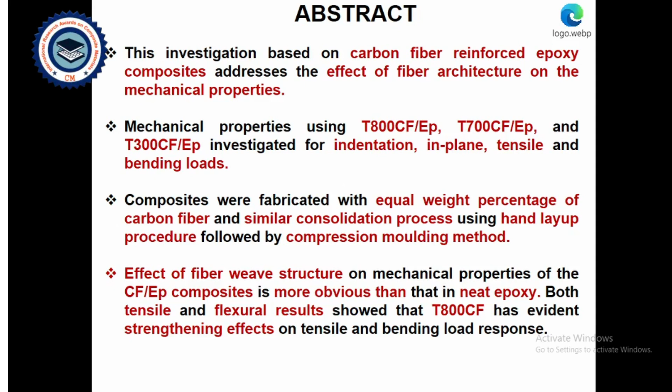Both the tensile and flexural results showed that T800 carbon fiber epoxy composites has evident strengthening effects on the tensile and bending load response.

Also, fiber architecture marginally affects density and severely affects strength and deformation. Here, composite performance is dictated by inherent properties and fiber weave structure. Even with fiber flaws, porosity, defects, and stress concentrations, the weaving pattern is so beneficial that it makes composites more or less insensitive to flaws.

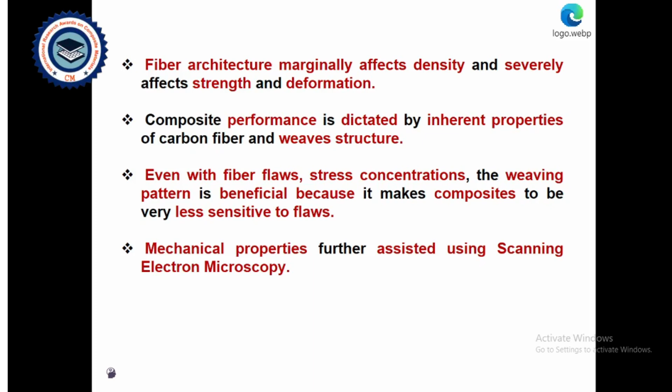Finally, mechanical properties were further assessed using SEM, that is scanning electron microscope.

The key literature consists of carbon fibers presenting exceptional advantages in strength-weight relation, affecting mechanical properties, Materials Letters, which was studied by X. Liu and team.

The impact of carbon fiber architecture on the mechanical properties of composites, especially two failure modes critical in designing with delamination, flexural failure, and polymers.

Carbon fiber epoxy composites display higher mechanical properties, studied by B. Patro and team. Common fabrication induced flaws and defects with corrective actions to improve sample quality, studied by U. Farooq and P. Myler.

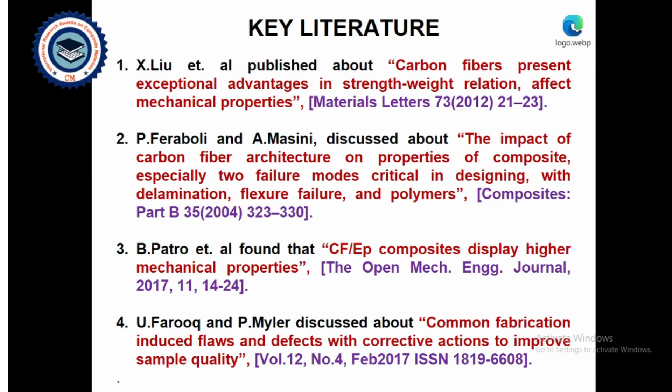Number of laminae in composites and fiber orientation affect mechanical properties, studied by H. Rahmani and team. Proper combination of polymer arrangement is essential in structural composites, studied by J.M.F. de Paiva and team.

Toray sized T800 carbon fiber epoxy composites had higher mechanical properties, studied by L. Wang and team. Mechanical and dynamic mechanical properties of fiber reinforced composites improved significantly with increased fiber content, studied by W. Liu and team.

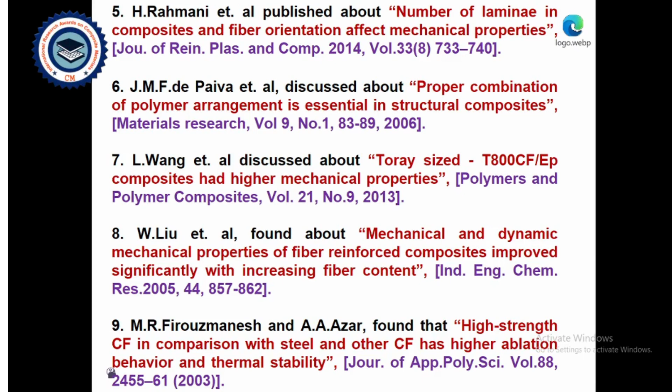Research gap: less research work on carbon fiber epoxy composites considering different carbon fiber architecture has been observed. Less research work on twill woven carbon fabric, that is hybrid carbon fiber epoxy composites. Then PMC structures fail in flexure, hence development of new fiber structure with improved flexural properties is needed.

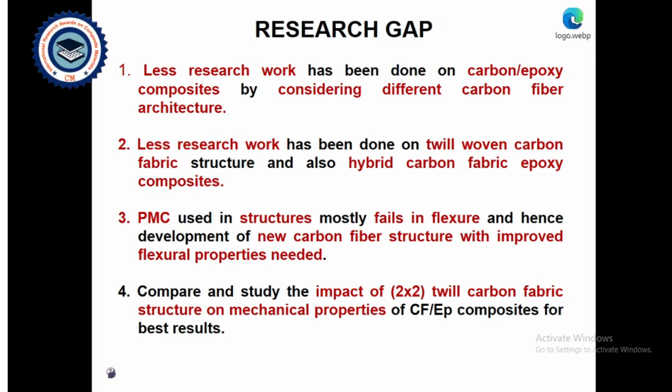Impact of 2x2 twill carbon fiber structure on mechanical properties for best results - we want to compare and study it.

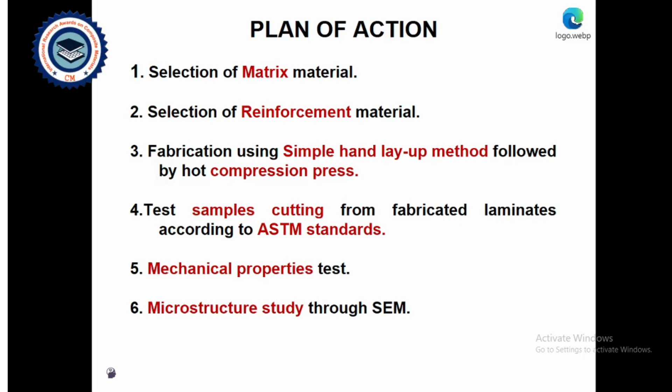Plan of action: selection of matrix material, reinforcement material, fabrication using simple hand lay-up method followed by hot compression press, test samples cutting from fabricated laminates according to ASTM standards, mechanical properties test, and microstructure study through SEM.

Method of fabrication, selection of matrix material: first, epoxy resin Araldite LY1564, hardener Aradur 22962, and the epoxy resin-hardener mixing ratio by weight percentage was 100:25.

Selection of reinforcement material: carbon fiber will be bidirectional twill T800, T700, T300, and combinations of T800-700, T800-300, and T700-300. Twill structure was selected because the pattern is elastic, the weave is looser, and it is good for complex shapes.

The composite compositions studied were: T800 carbon fiber alone with epoxy, T700 alone, T300 alone, then combinations of T800 and T700, T700 and T300, T800 and T300 with epoxy.

For these combined composites, the carbon fiber and epoxy by weight percentage remain the same: 60% carbon fiber by weight and 40% epoxy by weight respectively.

When it comes to individual carbon fiber, only one type of carbon fiber, it is 60%. When it comes to combination, we selected 30% plus 30% for each of the two carbon fibers.

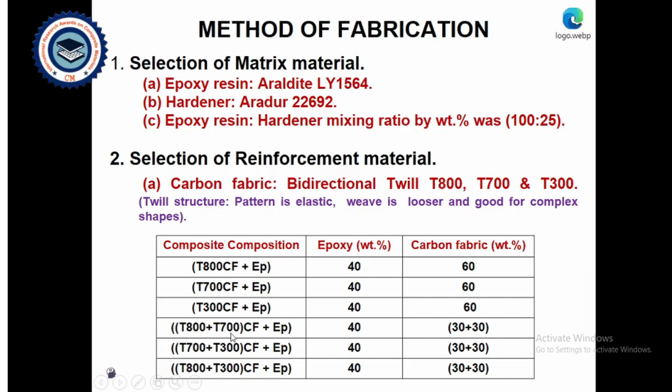We use the simple hand lay method to obtain the required fabricated composite material, followed by hot compression press, with nominal equal weight percentage and identical consolidation process for all 6 types of carbon fiber composites. Compression used was 0.5 megapascal, cured 24 hours at normal room temperature, then cured in an air-distributed oven for 1 hour between 90 to 100 degrees.

Laminate size was 300 by 215 by 3 millimeters.

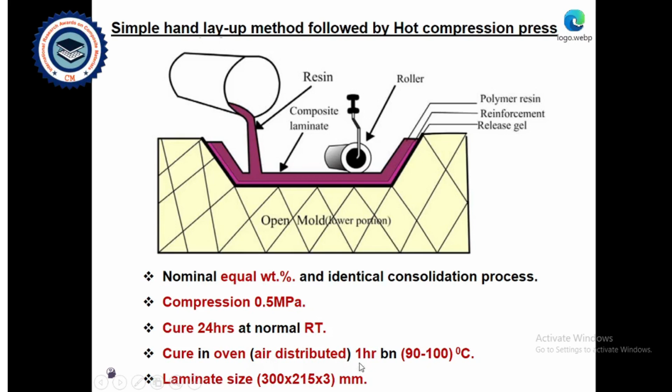Tests performed for mechanical properties included: interlaminar shear strength, hardness using Shore hardness, tensile properties (strength and modulus), flexure properties (strength and modulus), and impact strength. The ASTM standards followed were ASTM D2344, D2240, D638, D790, and D256.

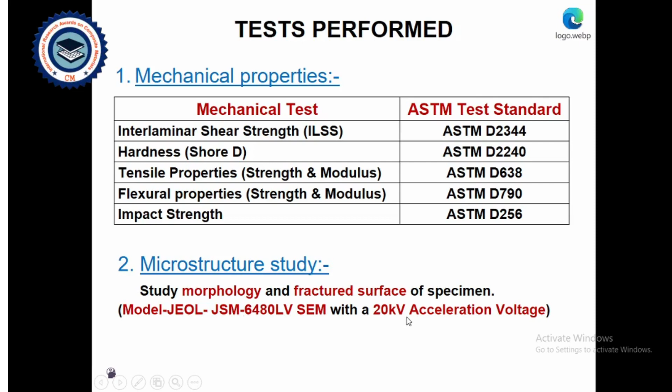Microstructure study: to study morphology and fracture surface of a specimen, model JEOL JSM 6480 LV SEM was used with a 20 kilovolt acceleration voltage. Now for the results and discussion of mechanical properties.

If we observe the graph of composite combination versus ILSS, that is interlaminar shear strength, we can see that T800 composites provided maximum values. Low values were observed in T700 and T300 individual composites because there was an increment in void fraction in the composite, which results in decrease of adhesion among the fiber and the matrix.

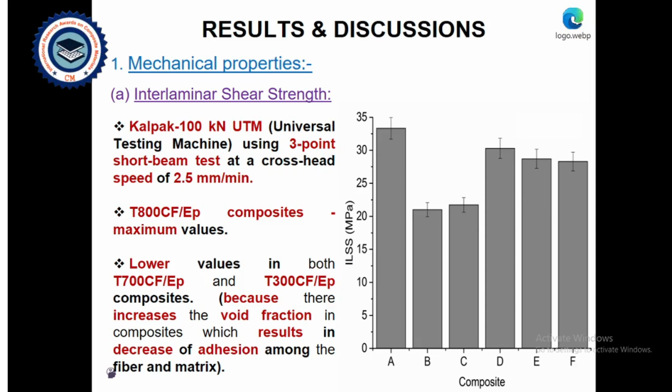Here we used a 3-point short beam bending test at a crosshead speed of 2.5 mm per minute. Next, the hardness.

FT300 and FT800 represent the surfaces of T300 and T800 surface of carbon fiber epoxy composites, hybrid composites. Likewise, DT800 and DT700 represent surfaces of T800 plus T700 carbon fiber hybrid composites. Likewise, ET700 and ET300 represents the surface of T700 and T300 carbon fiber hybrid composites.

Shore durometer tester was used. Maximum values were observed in T800 composites and lowest was observed in T700 composites. It was also observed that in the combined composites, the maximum values were obtained for composites made with T800.

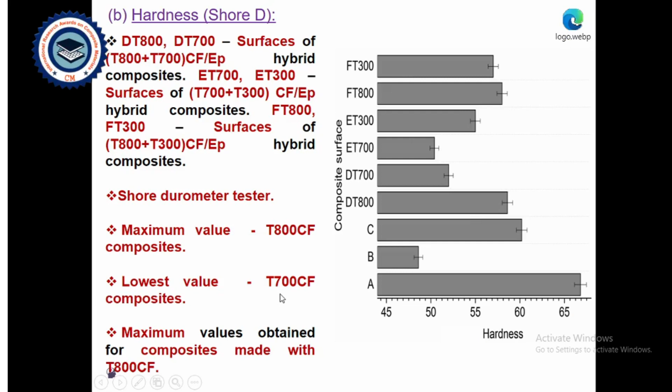Tensile properties. We can see the graph here: composite versus the tensile strength and tensile modulus. Left, you can see the tensile strength in megapascal, and right y-axis gigapascal, Young's modulus. The crosshead speed was 2.5 mm per minute while testing.

Young's modulus varied significantly with regard to fiber structure. The number of layers involved during fabrication of composite did not perfectly influence the properties. T700 carbon fiber composite presented the highest elongation, whereas the T300 carbon fiber composite showed minimum values.

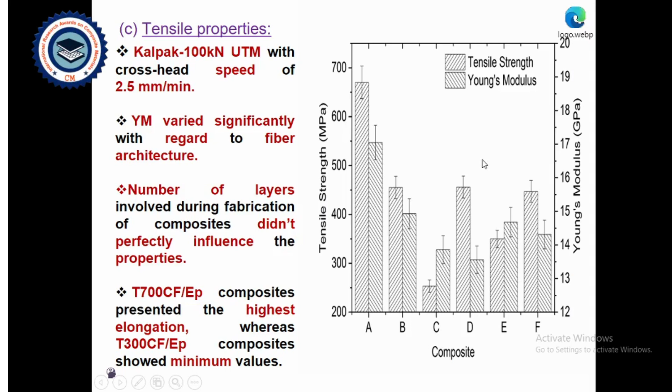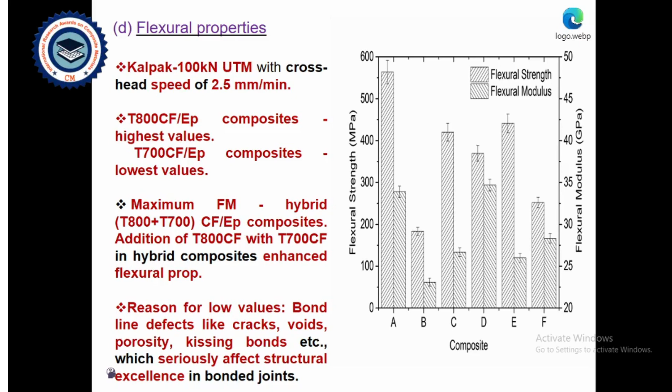Flexural properties. Once again, here also crosshead speed of 2.5 mm per minute was observed. T800 composites provided the highest value and T700 composites showed the lowest values. Maximum flexural modulus was observed in hybrid T800 plus T700 carbon fiber epoxy composites. Addition of T800 carbon fabric with T700 carbon fabric in hybrid composite enhanced flexural properties. Reason for low values may be bond line defects like cracks, porosity, voids, kissing bonds, etc., which seriously affect structural excellence in bonded joints.

Impact strength. Here the cantilever beam impact estimation Izod type was used, ISO R3 hammer and 0 to 10.84 joules. Preparation of a 45-degree V notch was done on the center of the specimen using a notch cutter before doing the impact test. T800 T700 carbon composites showed the highest value, whereas the T300 showed the lowest value. Composite made with T700 composite showed higher impact strength than other composites.

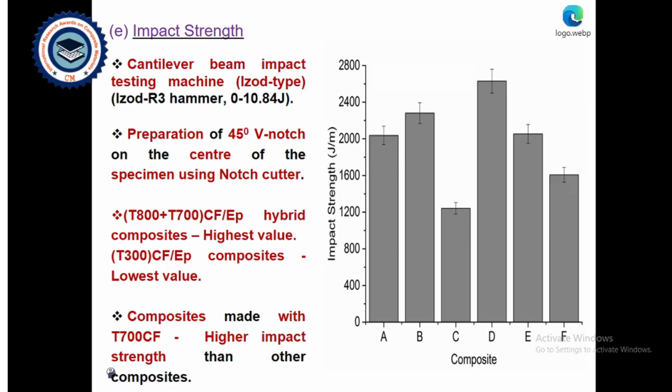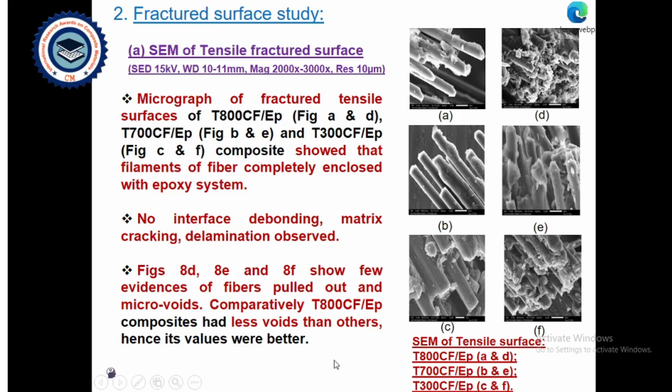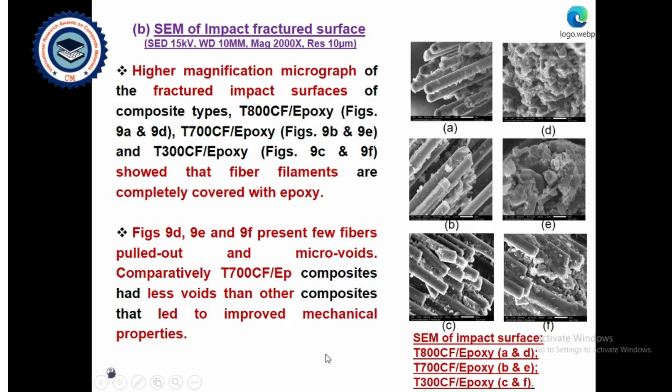Likewise, in the impact fracture surface, figures A, B, C, D show that fiber filaments are completely enclosed with matrix. However, D, E, F figures show us a few fiber pullouts and micro voids. Compared to T700 composite, it had less voids than others, and hence it showed better impact property.

Conclusion: T800 composite showed dominant mechanical property. However, its elongation and deflection difference with others were not significant. T800 composites also had higher interlaminar shear strength and hardness than other composites, and enthralling situation happened where the flexural properties of T700 carbon fiber composites were lower than the other composites. Composite with T700 carbon fiber had higher impact strength than the other composites.

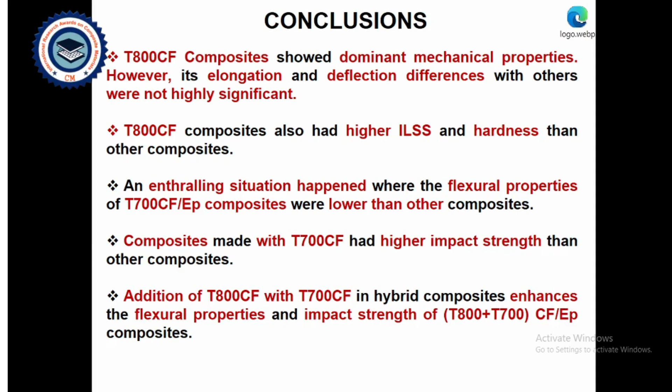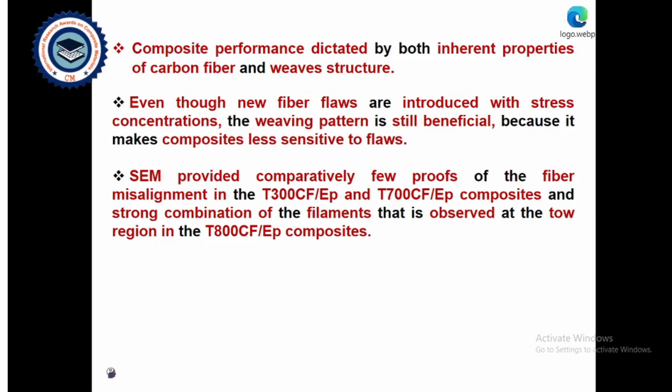Addition of T800 carbon fiber with T700 carbon in hybrid composites enhances flexural properties and impact strength of T800 and T700 carbon fiber composites. Also, composite performance is dictated by both inherent property of carbon fiber and weave structure. Even though new fiber flaws are introduced with stress concentration, the weave pattern is still beneficial because it makes composites less sensitive to flaws. Finally, the SEM provided comparatively few proofs of fiber misalignment in the T300 carbon fiber and T700 carbon fiber composites, and a strong combination of filaments was observed at the tow region in the T800 carbon fiber composites, hence T800 showed better properties in most of the properties.